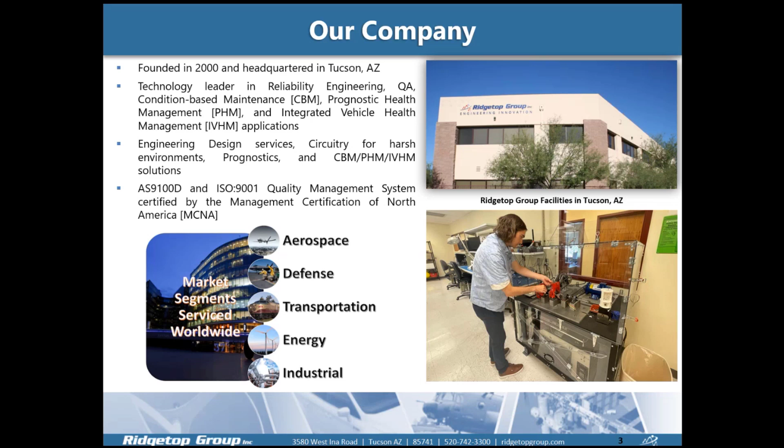Next, we'll provide a brief introduction and outline for the scope of today's session. To start, let's take a look at this diagram, which illustrates a conceptual approach to a prognostic health management, or PHM, framework. Today's webinar will focus on how various PHM frameworks can be integrated into a unified control and data flow structure, such as Sentinel Motion.

This particular diagram was originally developed by our late colleague, James Hoffmeister, or Hoffy, and it reflects our work in advanced diagnostics and prognostics for aerospace and transportation applications.

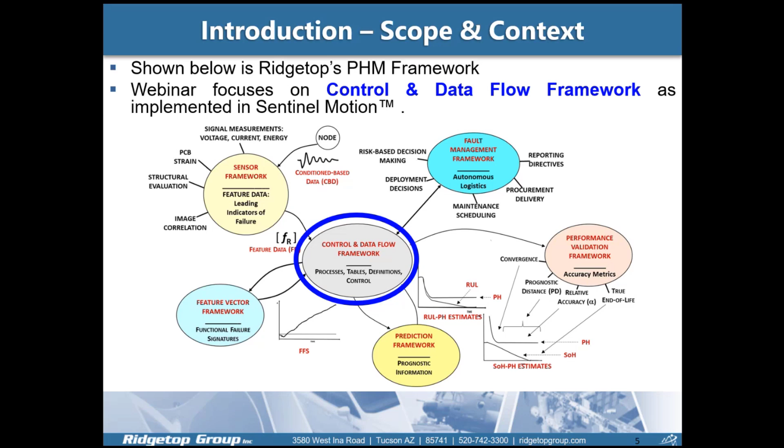In this framework, the sensor system first acquires raw data. That data then goes through a feature extraction process, which identifies specific features linked to a potential failure mode, and from there, a prediction model analyzes feature data to provide prognostic insights. That in turn supports decision-making for fault management and health management actions. The goal is to create a validated solution that can be applied effectively for a unique customer's application.

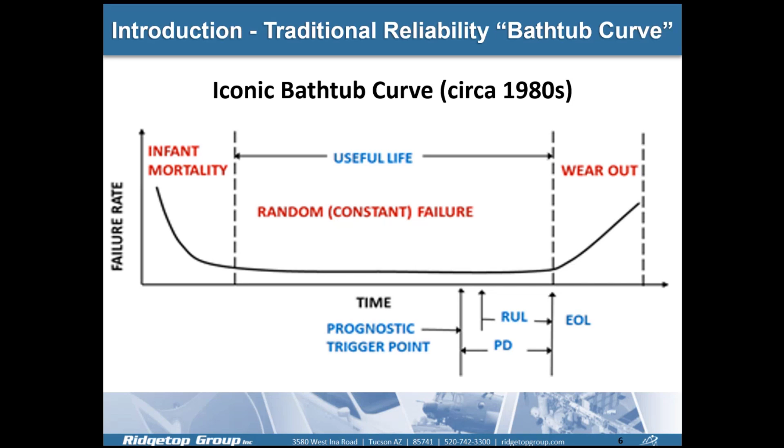Over time, wear out occurs, leading to the end of the useful life. The time between detecting degradation and the point of functional or physical failure is known as the remaining useful life, or RUL, which is critical for maintenance planning.

With this understanding, it's important to note that maintenance practices have evolved significantly over time. Historically, maintenance was reactive, but as we've learned more about the bathtub curve and CBM and PHM practices, there has been a clear shift towards proactive strategies. Ridgetop has been at the forefront of helping customers make this transition, developing hardware, firmware, and software-based solutions to move from reactive to proactive maintenance strategies tailored for a specific system and application.

As part of this transition, there are intermediate stages such as preventative maintenance and condition-based maintenance before reaching a full PHM or predictive maintenance deployment. For example, a preventative maintenance strategy might be performing a scheduled oil change every 6 months, which is time-based. In contrast, condition-based maintenance uses sensor data to monitor actual degradation. As more data is gathered, this can evolve into predictive maintenance strategies where potential failures are anticipated before they occur. Over the years, Ridgetop has developed a range of tools to support this evolution, helping organizations move from basic preventative strategies to more sophisticated prognostic and PHM-based solutions.

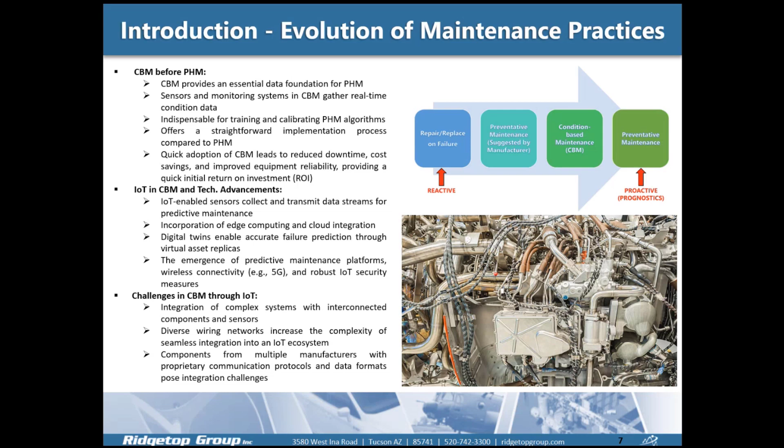Now that we have a solid understanding of the PHM frameworks, let's introduce the Sentinel Suite family of solutions. This suite is comprised of 4 key application-specific solutions: Sentinel Motion, Sentinel Power, Sentinel Interconnect, and Sentinel IT. Each solution is tailored to a different application area, and they utilize distinct feature data types and reasoning methods to assess degradation and provide a prognostic evaluation for specific failure modes of interest.

For today's webinar, we'll focus on Sentinel Motion, which is a product line designed to monitor the electromechanical failure modes in systems such as aircraft, infrastructure, wind turbines, and other critical equipment. The main goal of this technology is to prevent unexpected downtime by providing real-time diagnostics and prognostics to support better maintenance decisions.

With this real-time information, organizations can take proactive CBM and PHM actions. These actions might include optimizing inventory levels, scheduling part replacements, or organizing maintenance and services for line replaceable units. In more advanced cases, when control logic and health management are integrated into the system, automated actions can be taken to optimize performance based on mission requirements, duty cycles, or specific operational use cases. This ability to automate and integrate health management within the system is critical for reducing downtime, increasing operational efficiency, and minimizing costs, especially in complex environments like aerospace, wind, and energy.

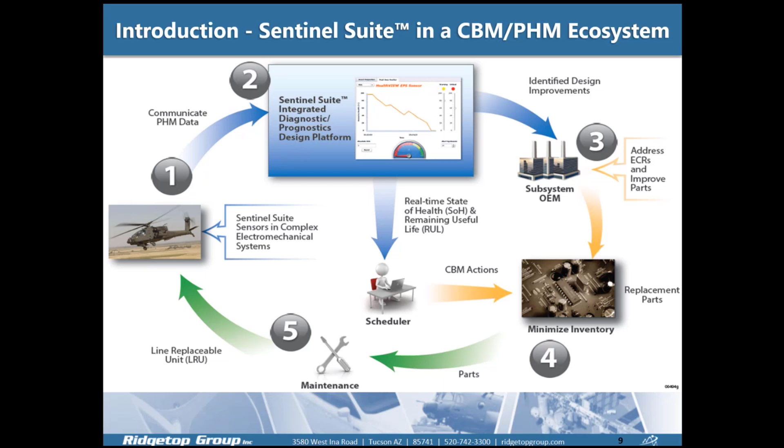Now let's take a look at some of the development history and how our technology aligns with the IEEE 1856-2017 PHM standard.

Between 2009 and 2015, the foundation for this technology was laid out through the NASA SBIR program that I mentioned earlier, where we focused on failure modes in helicopter gearbox systems. At this time, this was really before the term IoT became a widely recognized term as it is today. We were comparing the performance of an embedded accelerometer against traditional case-mounted accelerometers, an effort that hadn't been done previously, especially in a metal gearbox system where it is very difficult to get an RF signal out of such a system.

Despite these challenges, we succeeded, and we proved it was not only feasible, but also that we were able to extract a fault-to-failure progression signature by looking at the time synchronous averaging signal for a cracked gear tooth. The testing for this was conducted at the NASA Glenn Research Center using the transmission gearbox of a Bell Kiowa helicopter.

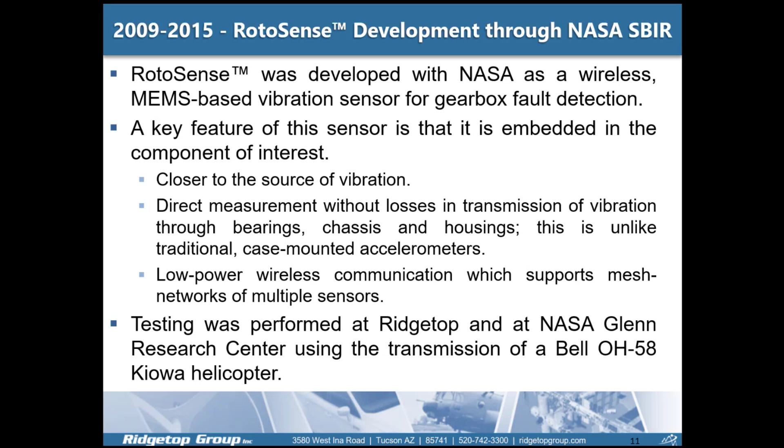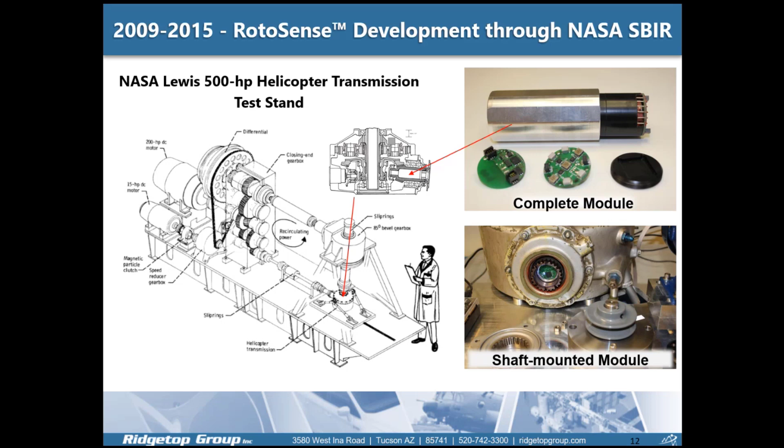Once data was captured, it was transmitted back to a centralized gateway system, which handled both the data acquisition and offloading for post-processing and analysis.

To quickly summarize the results of that research, the technology performed exceptionally well during testing, with over 113 hours of continuous operation in a highly accelerated life test, or HALT test. During these tests, operating speeds reached up to 6,000 RPM, and RotoSense captured just as much data as 5 case-mounted accelerometers with a very high sample rate and continuous transmission of accelerometer data.

The key takeaway was that we successfully extracted the failure mode across all 3 axes being monitored, and the TSA, or time synchronous averaging signal, proved to be a useful feature data extraction technique and prognostic assessment for the cracked gear tooth fault. These results were published in a white paper covering the evolution of MEMS-based wireless accelerometer sensors, followed by a NASA spin-off article on how we adapted this technology for the railroad industry.

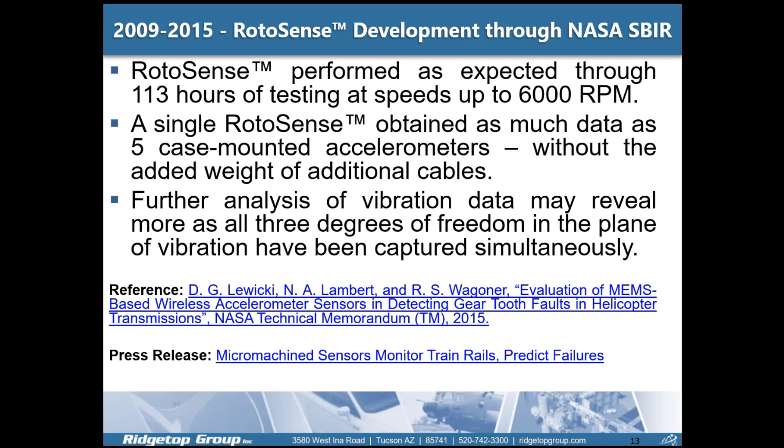Since 2015, we've made significant progress applying this technology to other industrial IoT applications. Here are some key publications documenting how we hardened this design, working closely with railroad and railcar manufacturers. We tested the sensors in extreme vibration and temperature conditions, as well as other environmental stress factors, adhering to IEC standards.

As a result, the sensors were qualified to withstand continuous vibration levels up to 100 Gs across a range of frequencies. Our ongoing research, in collaboration with universities and through our own Ridgetop laboratory, has taken this technology from a useful R&D tool to a field-tested and deployed solution. We've been working on small-scale pilot studies in the railroad industry, helping short-line railroad operators understand bearing degradation and track geometry issues. These studies have enabled operators to gather data and transition toward condition-based maintenance and prognostic health management of critical assets and their failure modes, which we'll touch on further.

So how does all this relate to the IEEE 1856-2017 PHM standard? Our technology was developed with a clear understanding of the PHM framework and its core operational processes. Recently, we redesigned the technology to be organized specifically around these core operational processes. It begins with sensing and data acquisition, followed by data manipulation through edge computing or post-processing, then state detection, health assessment, and prognostic assessment, which involves various analysis methods to evaluate performance and degradation for specific failure modes.

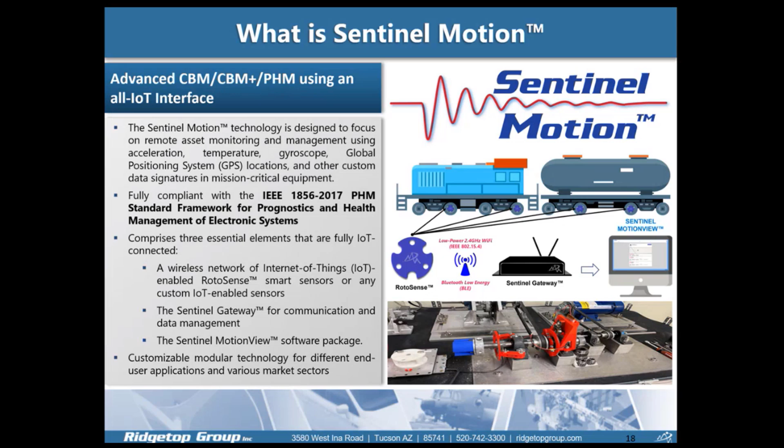Sentinel Motion is a customizable, modular technology for different end user applications as well as different market sectors. So what are RotoSense smart sensors? RotoSense is basically an advanced wireless IoT sensor tailored for harsh environments like railroads, aerospace, transportation, or industrial settings. It's housed within a robust assembly and features a triaxial accelerometer with an impressive 200G sensing range.

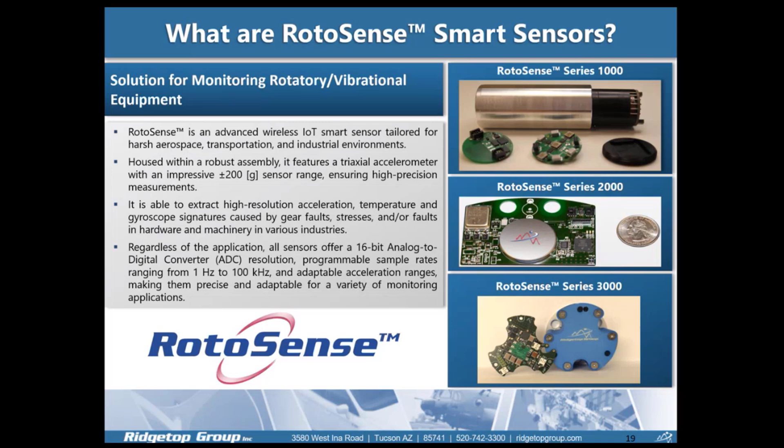It's also able to extract high resolution acceleration, temperature, and gyroscope signatures that are often caused by gear faults, stresses, and other machinery faults. Regardless of what it's being used for, all sensors have a 16-bit ADC resolution, programmable sample rates from 1 hertz all the way up to 100 kilohertz, and adaptable acceleration ranges. Shown here to the right are different form factors for RotoSense, with RotoSense 1000 being the earliest iteration, all the way down to RotoSense Series 3000, which is currently being used for deployments.

Now we have the sensor part, but we need something to collect the sensor data and manage all that. So for that, we have the Sentinel Gateway.

It is an IoT communications device and data management hub that brings edge computing to applications where your smart sensor networks are deployed. When combined with Ridgetop's RotoSense or any custom smart sensors, the gateway provides the end user a complete data acquisition and management toolbox, along with asset monitoring and management functionalities too.

The gateway has a Linux-based single board computer at the core. You can access it using Ethernet, cellular, and dual-band Wi-Fi. It also offers a secure access point and network drive for all log data. We also have a 1 terabyte SSD for local data storage, a dead reckoning GPS module for the GPS data stream, which is used to correlate to the acceleration sensor data. And lastly, the gateway hosts the Sentinel Motion View software application.

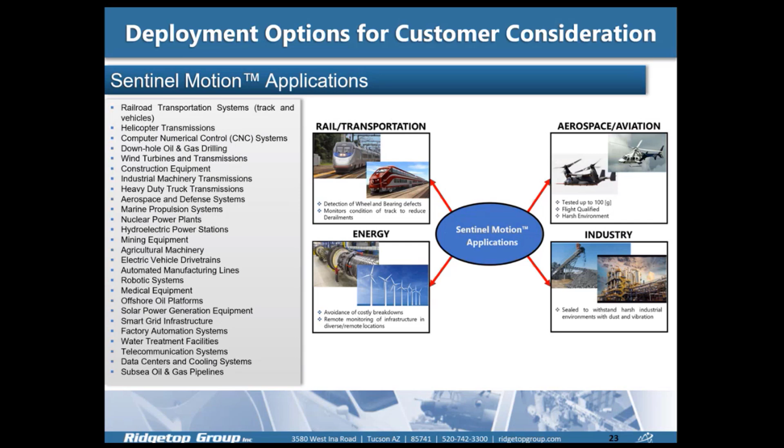Likewise, it can also be used in aerospace and aviation for harsh environments up to 100G, and the smart sensors RotoSense are flight qualified for such environments. We also use Sentinel Motion in the energy and industrial sectors, where we try to avoid costly breakdowns and have to monitor remote assets in remote locations. Specifically today, we'll take a deeper dive into Sentinel Motion for rail.

Now, let's take a look at some of the major challenges the railroad industry faces today. First, there are a number of common problems that can affect the safety and efficiency of rail transportation. These include mechanical failures of railroad vehicles or their components, frequent derailments, and poor ride quality. We also face environmental and weather-related issues that can disrupt operations, such as extreme temperatures, floods, and snow. Communication and signaling failures pose a risk to safe railroad management, while infrastructure deterioration continues to be a pressing issue. Lastly, improper loading and securing of cargo can also lead to accidents or delays.

But what are the root causes of these problems that were discussed above? They can be traced back to several key factors: broken rails or welds, failed bearings, and defective wheels. There's also unusual track interaction, which can be exacerbated by aging infrastructure. Think about friction wear and track deterioration. Human factors also play a role. Errors by operators, such as excessive speeds or overworked crews, are a significant concern. Additionally, poor maintenance, track geometry, and extreme weather conditions like floods or snow often contribute to the issues faced by the industry.

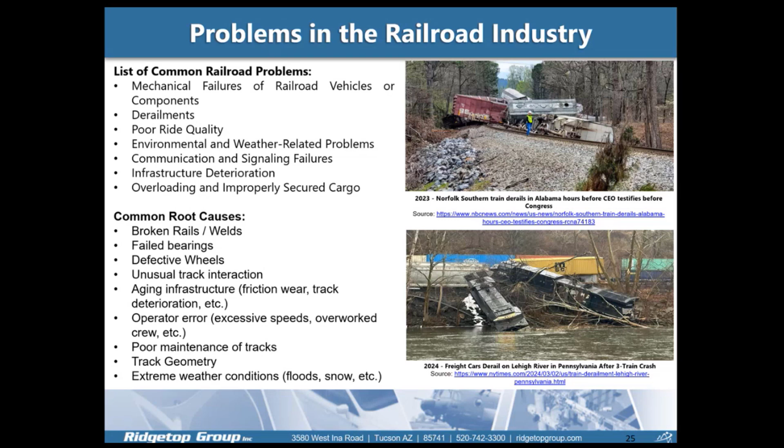So currently in the railroad industry, they use mostly traditional maintenance practices, which are wayside detection equipment, such as your hotbox detectors that we talked about just now, and the wheel impact load detectors. Also, there's visual inspection and written reports, work order requests, and then interval-based maintenance. Most of this happens in the reactive maintenance realm, and it can prove to be very expensive.

So to solve this problem, as of today, there's emerging technologies and solutions like big data analytics. Machine learning is a big one. Forecasting and advanced modeling, IoT sensing, and sending inspection vehicles to the track itself is a big one. Next.

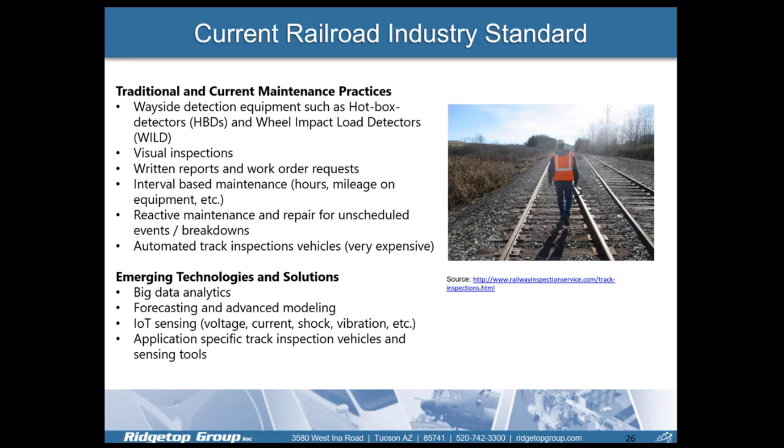So when we got into the railroad industry in 2015, Ridgetop tested Sentinel Motion as a part of an FRA R&D program at the Transportation Technology Center Inc., now MXV Rail, in 2015 on their high tonnage loop. The original RotoSense design from the NASA project that I talked about was integrated into the industrial wheel hub sensor design that is shown on the right here.

The main testing objectives were to characterize track infrastructure, which is also to geolocate track features, to detect track anomalies such as broken welds, and to detect faults in wheels, hubs, and bearings. So Ridgetop found that Sentinel Motion was a viable IoT solution for such harsh railroad environments. We were also able to detect common track features such as turnouts, welds, concrete and steel bridges, and also crib ties. And Sentinel Motion was found to be a scalable solution for remote asset monitoring and diagnostics and prognostics of track, wheels, and bearings. Next.

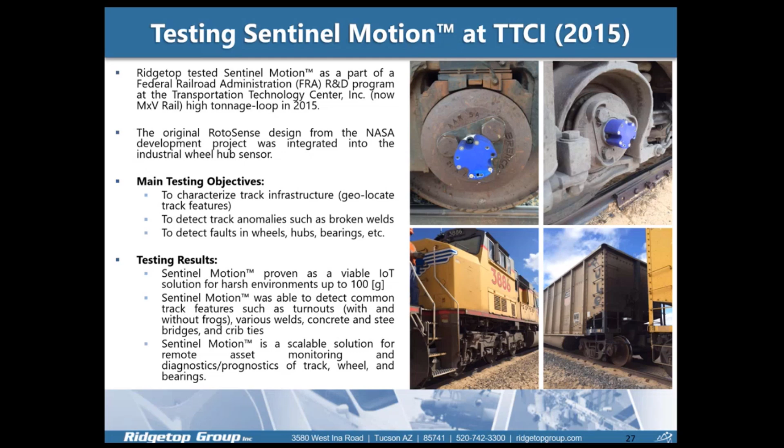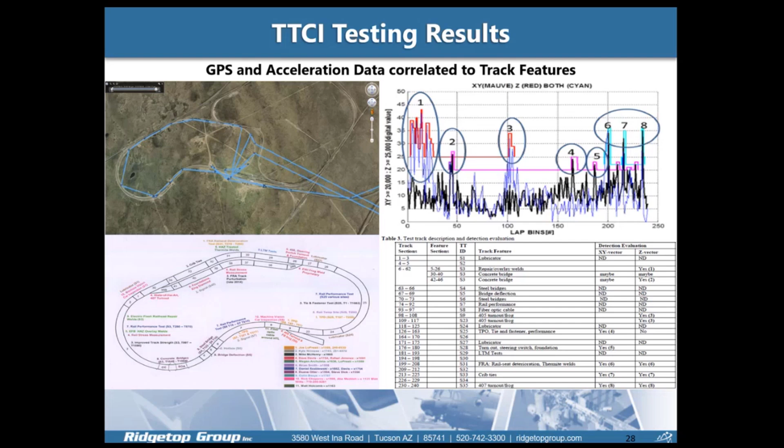As of today, Ridgetop and Innovative Operations Technology, IOT, are currently collaborating on a joint pilot study program with Reading, Blue Mountain, and Northern Railroad in Port Clinton, Pennsylvania. This is where the latest design upgrades to Sentinel Motion for rail are being tested and evaluated.

The main testing objectives here are to verify that the SNR has improved since the TTCI testing, to verify wireless and cellular communication in remote scenarios, to verify the use of new and different sensor operating modes, to verify new software capabilities for Sentinel Motion View, to geolocate and this time generate a profile library for different track features, and to compare data observability at the bogie frame and at the wheel hub.

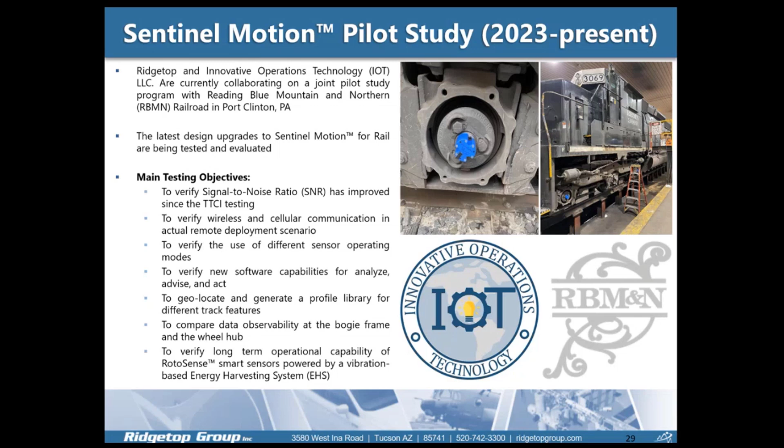Ridgetop has also been working on a vibration-based energy harvesting system that will self-power the RotoSense smart sensors. So we also intend to verify the long-term operational capability of this system. Next. Now we'll go ahead and take a look at the Sentinel Motion View GUI and its workings here through a short video. Next.

Welcome to today's demonstration of Sentinel Motion View. Today we'll showcase the latest features and enhancements designed to not only collect and analyze data, but to actively monitor and manage the health of your assets in real time. While today we'll focus on railroad applications, monitoring critical components like wheel bearings to prevent derailments, this tool is versatile and can be tailored to any system where vibrational data plays a key role. Let's dive into how this all-in-one solution works.

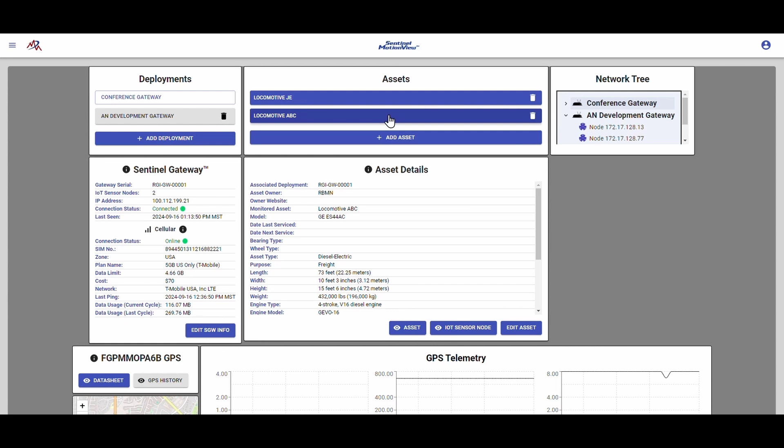Starting with our platform's dashboard, here you can see a comprehensive view of all of your connected assets and their related telemetry data. Cellular connectivity and additional user-defined data can be viewed for each connected deployment and the sensors associated with it. Down below, you'll find recent alerts and overall system health available at a glance, but we'll take a deeper look at that section later.

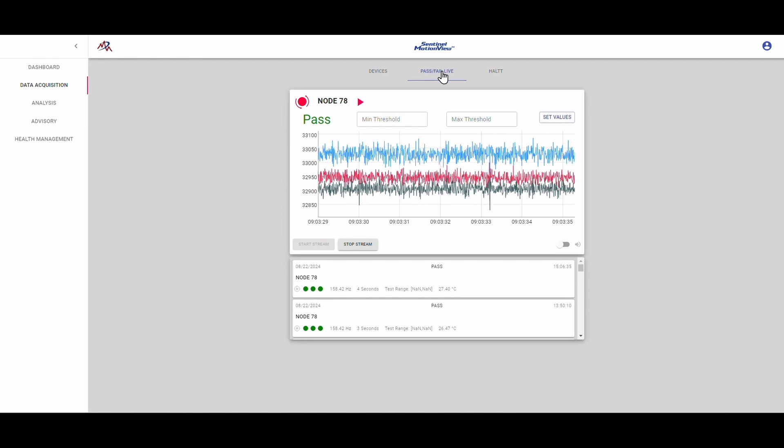Moving on to the Data Acquisition tab. Here we can manage our gateway settings and view any connected sensors. By selecting an asset, we can start data collection, view live vibrational graphs, and schedule data collections, allowing for real-time monitoring of the asset's conditions. In this case, we have vibration readings coming in from our RotoSense sensor.

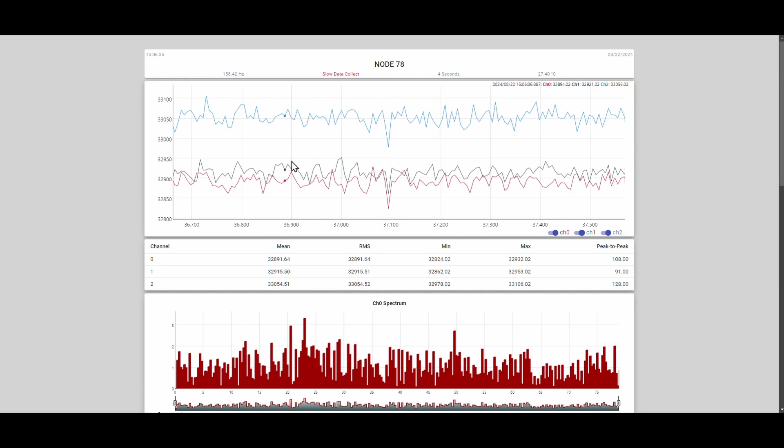Using the HALTT toolbox, you can easily schedule data collection from sensors attached to critical components like wheel bearings. For example, in the railroad industry, monitoring wheel bearings for abnormalities can mean the difference between a smooth operation and a potential derailment. With HALTT, you can schedule data collections at precise intervals, either as a burst to capture high-stress moments during acceleration or braking, or as a continuous stream when trains are in motion. This data can be collected at specific sampling rates based on the needs of your fleet, ensuring that any early signs of wear or overheating are detected before they lead to critical failure.

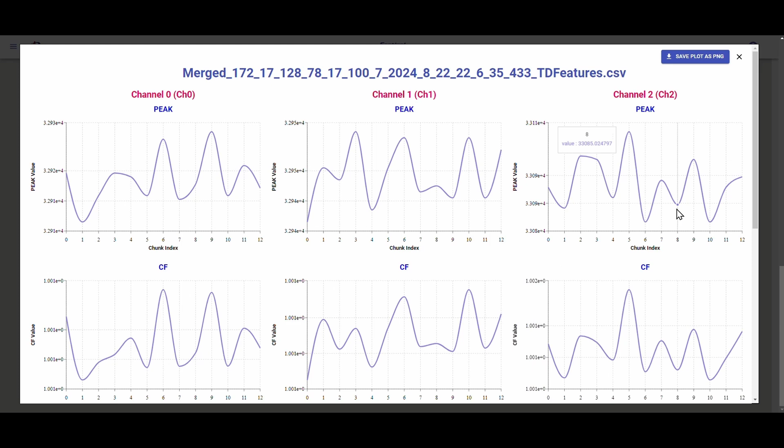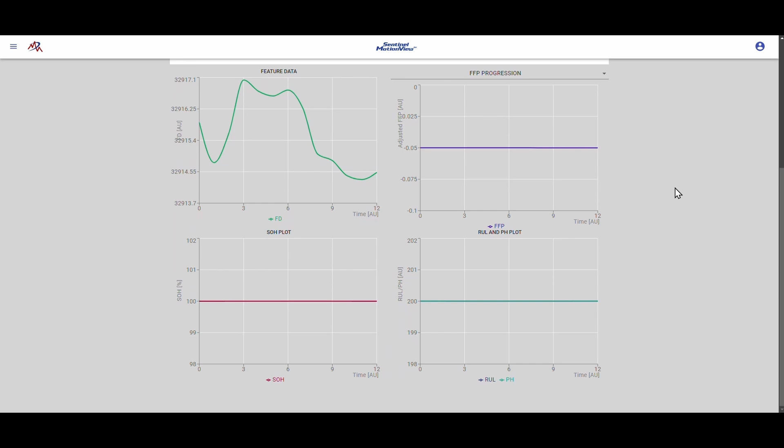Sentinel Motion View goes beyond just collecting raw data. Using feature data algorithms, we can convert this information into actionable insights. For example, the vibration data is processed to identify key indicators of potential issues, such as excessive vibration patterns, and generate a feature set that can be used for further analysis. Once we have the processed data, it's available to use as an input for our embedded Adaptive Remaining Useful Life Estimator, or ARUL.

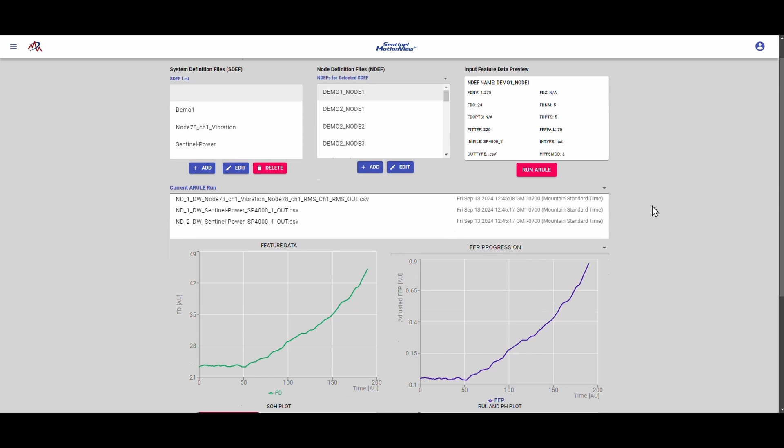This proprietary tool uses historical data and predictive algorithms to provide an accurate forecast of the asset's remaining operational time before maintenance or failure is expected. Simply create a node definition file and a system definition file, and ARUL takes care of the rest, giving you fault to failure progression signatures and other key prognostic quantities such as state of health, remaining useful life, and prognostic horizon.

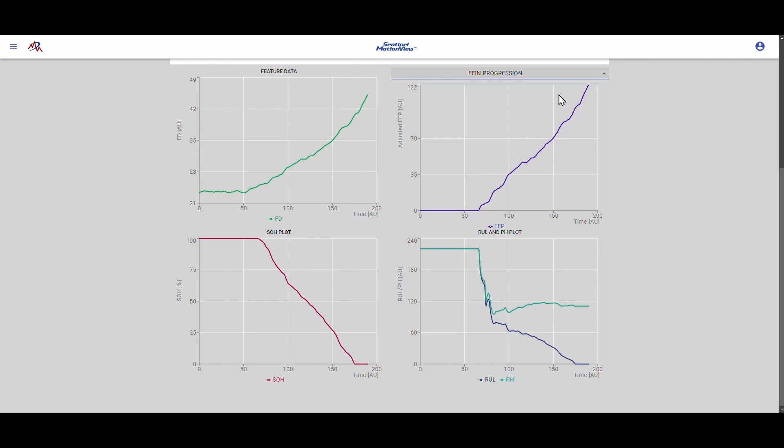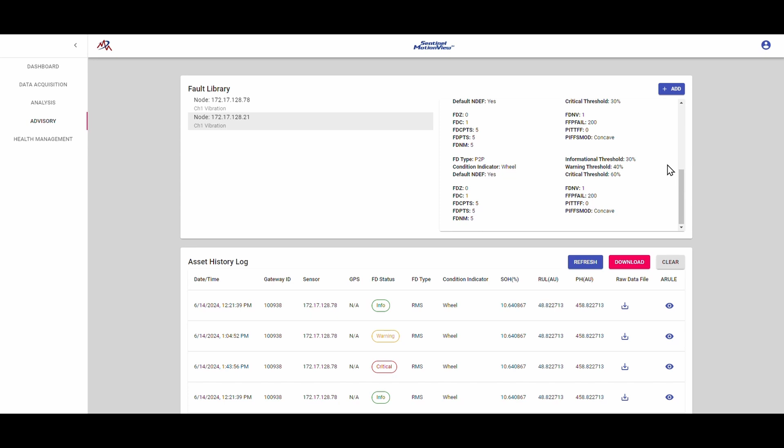One of the powerful features of our platform is the ability to automate the entire monitoring and alerting process into a single seamless workflow. With just a few simple steps, a fault definition can be created defining which asset or node to monitor, such as a specific wheel bearing, and every time data is collected for that asset, the system will automatically trigger a sequence of actions. First, the data goes through our feature data extraction process, where user-defined feature datasets are identified and extracted. Next, it runs through ARUL to assess the asset's health.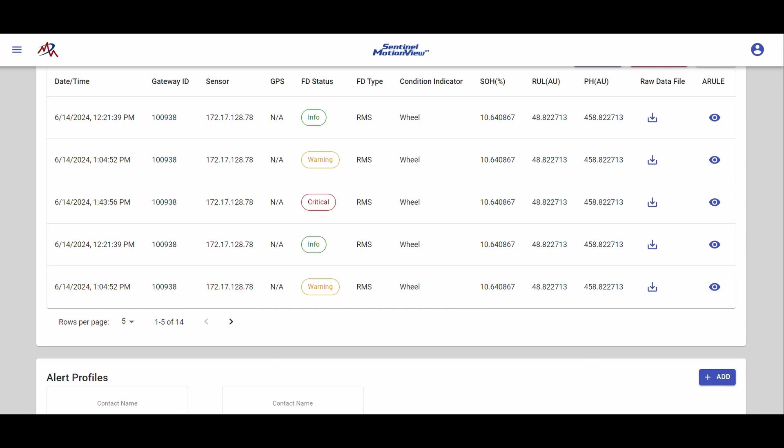Finally, the system checks the FFP signature of the ARUL analysis against the predefined thresholds. If the FFP signature meets any of the defined thresholds, informational, warning, or critical, the platform instantly generates an alert notifying you in real time so that you can take proactive action. This automation enables you to combine all aspects of monitoring, analysis, and alerts into one streamlined process, ensuring that potential issues are identified and addressed before they become critical.

Which leads me to our final tab, the Health Management tab. Here you can see how a service ticket is created and assigned, complete with all relevant data, including the affected asset, the issue type, and the recommended action. This keeps your asset management and maintenance processes organized and efficient.

As you've seen, Sentinel Motion View provides a comprehensive, all-in-one platform for managing your assets' health. By seamlessly integrating sensor data collection, advanced analysis, remaining useful life estimations, automated alerts, and service ticket generation, this solution enables you to proactively monitor and maintain your assets from a single streamlined system. With Sentinel Motion View, you can stay ahead of potential failures, reduce downtime, and maximize the lifespan of your assets.

So that was a great technology demonstration video there, but where do we go from there into the future? So let's go ahead and talk about some of the future R&D efforts that are going to take place at Ridgetop. Next.

So firstly, we are looking at the addition of gear and bearing specific features from Sim et al. into the FDEP toolbox, the feature data extraction and pre-processing toolbox that was highlighted in the video previously. In terms of some of the gear specific features, we're looking at FM0, SER, NA4, NB4, FM4, M6A, M8A, and the ER. Within these, FM0 detects changes in gear engagement patterns as an indicator of the gear's main fault. NA4 detects the progress of defects in gears. FM4 gives you the kurtosis of the difference signal, and M6A and M8A detect surface damage on machinery components.

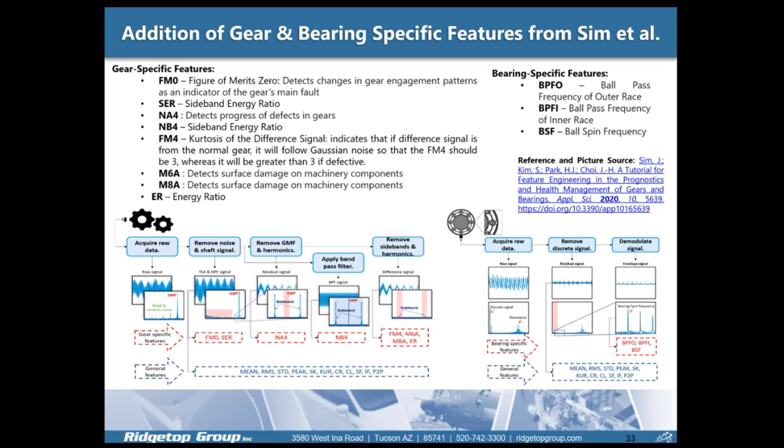Now, how this is all done from your raw data is shown in the diagram below. As far as bearing specific features go, we have the BPFO, BPFI, and BSF: ball pass frequency of outer race, ball pass frequency of inner race, and ball spin frequency. And again, how that is done from your acquired raw data is shown in the diagram below. Next.

We will also be implementing gear local fault diagnostic techniques from Azimi et al. This was a comparative study on using a wireless shaft-mounted versus bearing-mounted accelerometer, specifically looking at geared systems. It explores techniques such as TSA, order tracking, and continuous wavelet transform to extract key features and improve signal quality under fluctuating load speed conditions.

Some of the benefits of this study were enhanced fault detection sensitivity, where the shaft-mounted accelerometer captures more detailed signal and improves the early detection of local faults. We also have the directional measurement flexibility, as you can collect vibration data tangentially, longitudinally, and transversally. Techniques like TSA and CWT also help with noise reduction. And the shaft-mounted accelerometer also effectively identifies faults under different load speed conditions. This approach can also be applied to other machinery, not just gears; bearings, shafts, and turbines are some examples.

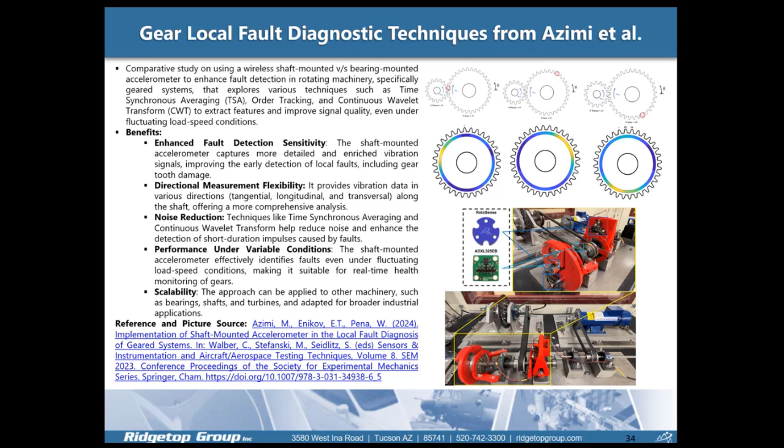So shown here to the right is a diagram of isolation of the gear fault and its visualization for different fault scenarios, where you can see the heat map of where the fault actually occurs as compared to its true known occurring position. And shown below is the in-house test bed that was used here at Ridgetop to conduct this study. Next.

Lastly, some other enhancements include we want to create a library of failure modes. So conducting HALT testing for different components like axles, bearings, and wheels, and building a comprehensive database for performing prognostics. We also want to incorporate additional data streams such as fuel consumption, brake temperature, ambient conditions like temperature and humidity, train load and cargo, and then voltage and current, especially moving forward for electric trains.

We also plan on implementing multivariate analysis through Ridgetop's 14 MVA algorithms that use multiple sensor data streams together and detect patterns and correlation indicative of wear and damage. Lastly, we also want to use machine learning, specifically ensemble learning, transfer learning, and then CNNs for spatial anomaly detection, like identifying wear patterns from track inspection data, and RNNs in the case of a regular vibration or sensor data. Next.